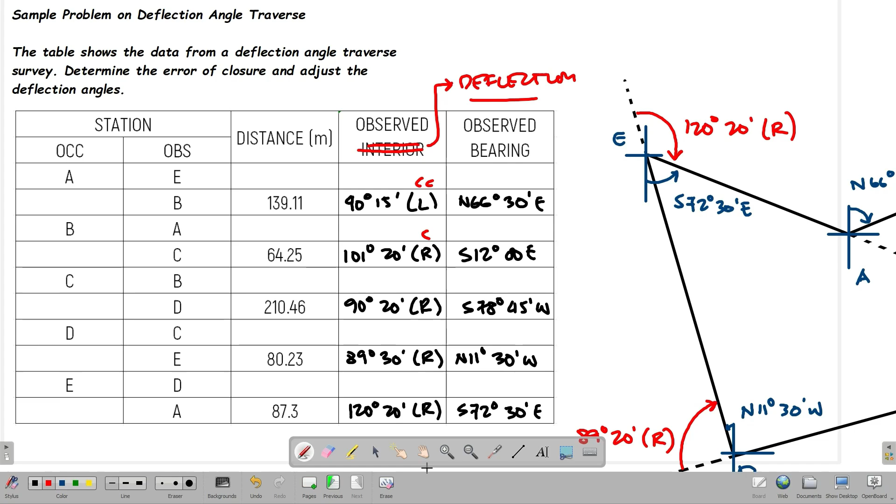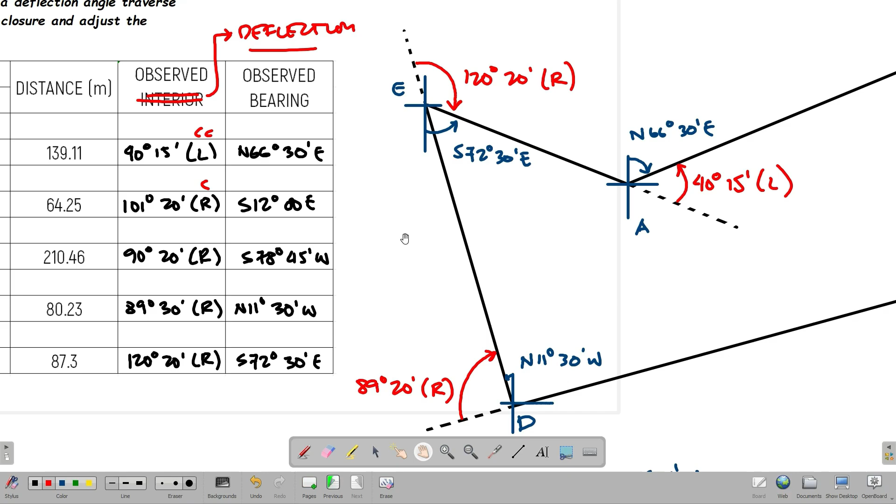We also have a given bearing for each line - bearing of AB, BC, CD, DE, and EA. This is our figure, based on the given values of deflection angle, bearing, and distance. It's not drawn exactly to scale, just estimated.

Let's first discuss the bearing since it's simpler. At point A, going to point B, that's northeast, 66 degrees 30 minutes east. So that's settled.

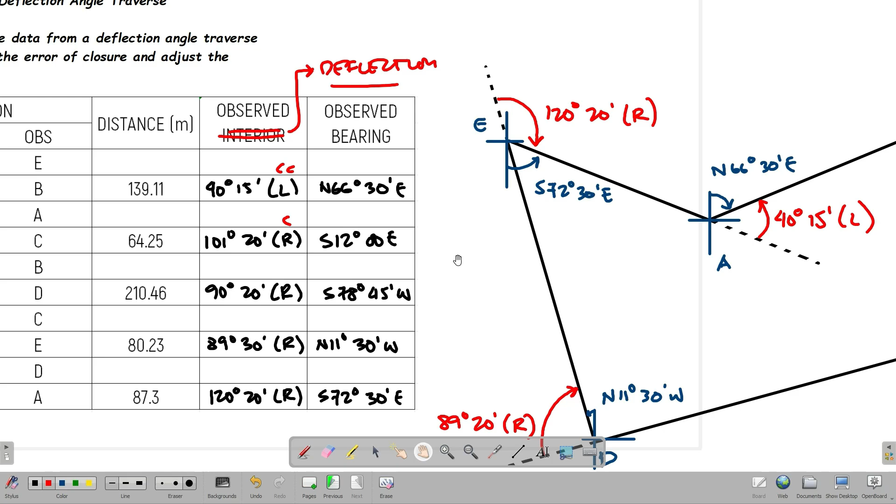The blue lines represent our bearing values. B to C, that's the second bearing, S12°00' East - from the vertical meridian going to the east, from the south, that's 12 degrees. Then this one, south, going west, from the vertical meridian south to west, that's 78 degrees.

This one is from the south. To clarify so it's not confusing - that's north. So south going east, that's 72 degrees 30 minutes east. So that's our bearing.

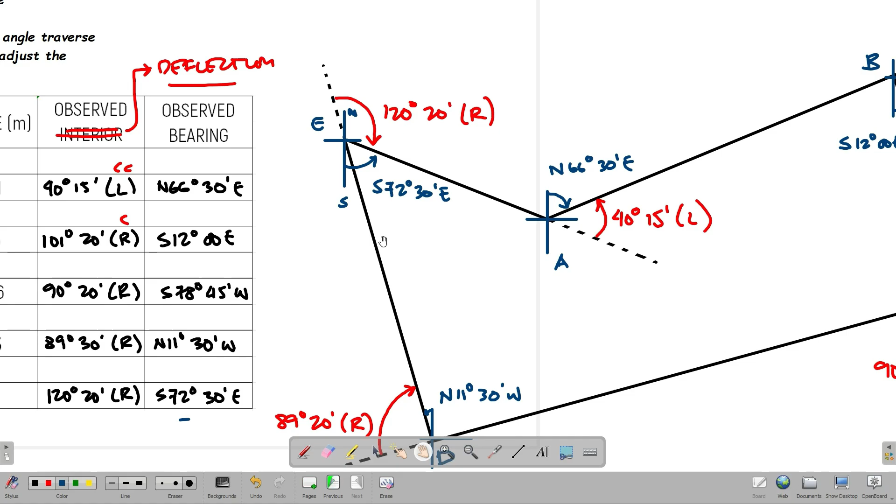The bearing is simpler to understand compared to drawing the deflection angle. Now let's go to the deflection angle - its definition is the angle from the prolongation of the preceding line. Based on our figure, the survey starts from point A.

The station occupied is at point A, and the direction of our survey goes from point A to point B, point C, point D, point E. So the preceding line, when we look at point A, is line EA, and its succeeding line is AB.

So the preceding line - the extension of EA - going to the succeeding line AB, is directed to the left, meaning counterclockwise. That's the direction of our arrow, counterclockwise, 40 degrees 15 minutes. Now at point B, the preceding line is AB, and the succeeding line is BC.

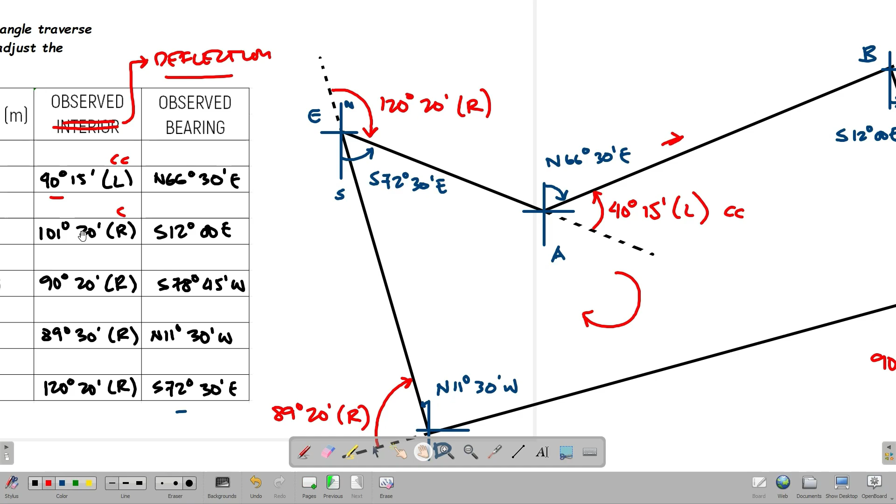So we extend line AB, directed to the right. Our angle is 101 degrees 20 minutes to the right, meaning the direction of our angle is clockwise. So that's 101 degrees 20 minutes to the right or clockwise. So this is our direction.

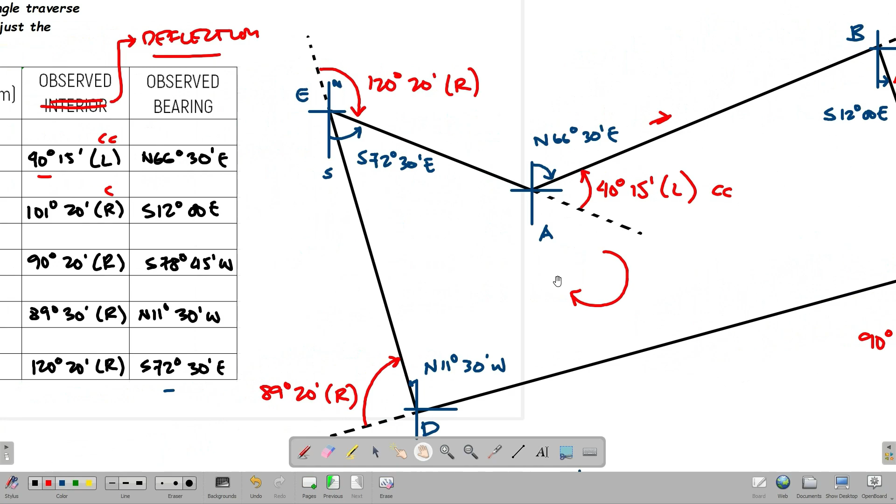Coming from the extension of the preceding line AB, going to the new or succeeding line, that's 101 degrees 20 minutes clockwise. So all our angles here, from this 101 going down there, which is 120 degrees 20 minutes, are to the right.

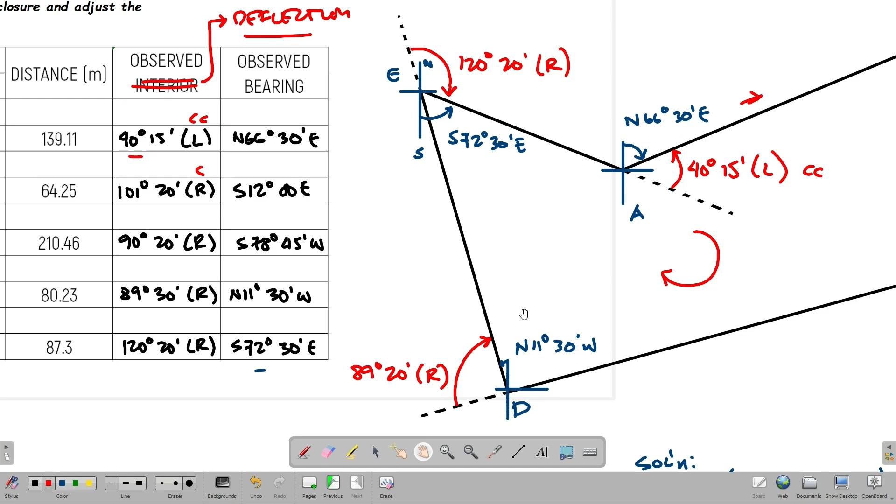Okay, then always the preceding line is what we extend. For example, at point C, our preceding line is BC, our succeeding line is CD. So we extend BC, then our angle is from the extension going to the new line. So this is our figure now.

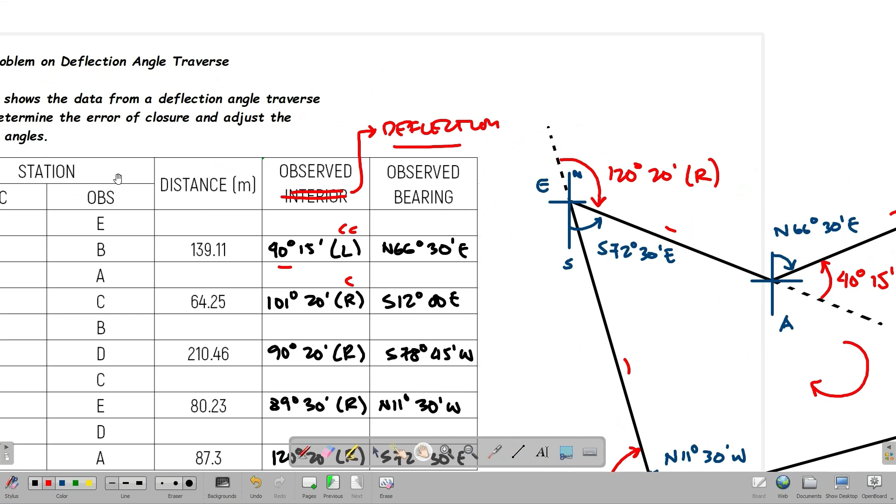The distances. Okay. So what we're doing here is the required error of closure and then adjust the deflection angles. So what we do here for the theory is that if our lines cross only once, the difference of our rotation, counterclockwise and clockwise, or vice versa, is always 360.

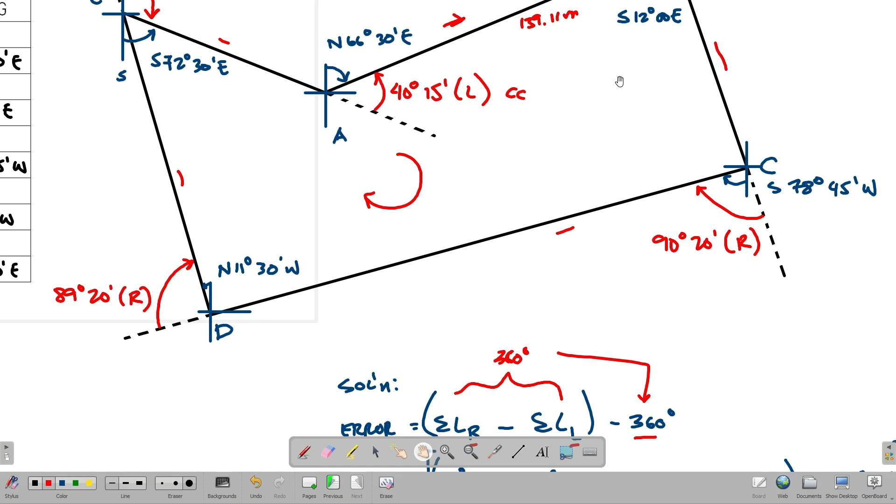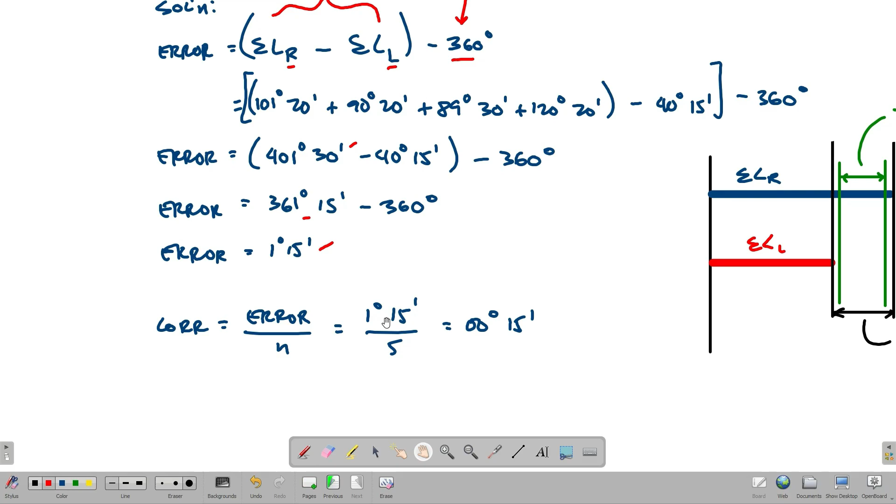So our error is 1 degree 15 minutes divided by 5. So that's 0 degrees 15 minutes. Let's just try it on our calculator.

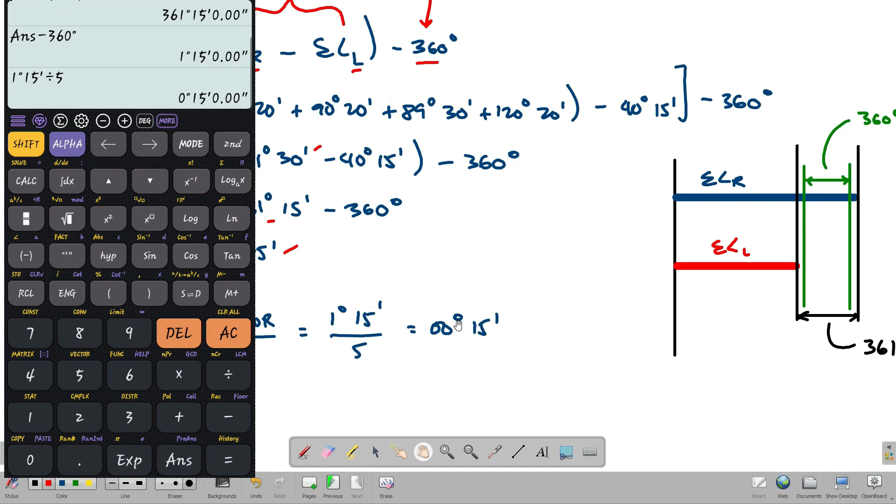So that's 1 degree 15 minutes divided by 5. So that's 15 minutes. Tama naman, confirm naman yung value natin.

Okay, so dito sa pag-apply, ang target natin, gusto natin i-minimize yung gap ng dalawang rotation, counterclockwise at clockwise, ay laging 360 degrees. So ito yung target natin, okay?

Ngayon, ang nangyari, medyo mas malaki yung gap, no? Kung titingnan natin dito sa figure natin, ito yung ginawa natin, yung blue is the summation of angles to the right, ito namang left is the summation of angles to the left. Medyo hindi siya drawn to scale din, kasi dapat maliit masyado yung angles to the left natin. Pero okay lang yan.

Para representation lang, okay? So ito yung target natin, which is the green, 360 degrees dapat na difference, no? Pero ngayon, lumagpas yung difference nila by 1 degree 15 minutes. So ibig sabihin, kailangan nating i-move closer yung gap natin, which is 361 degrees 15 minutes.

I-move natin closer na magiging 360 degrees na lang, yung gap. So ang gagawin natin, kailangan nating i-reduce yung mas malaking o dominant na summation, tapos i-increase naman natin yung lesser na summation. So we have minus dun sa mga angles natin to the right, and then we have add dun sa angles natin to the left. Mas madali pag ganito, no?

I-analyze mo na lang, kasi ito pwedeng baliktaran, no? Pwede magkabaliktad yung angle natin to the left at to the right na summation. Kunwari, ito ay summation ng angles to the left, tapos ito, summation ng angles to the right. So depende lang, no?

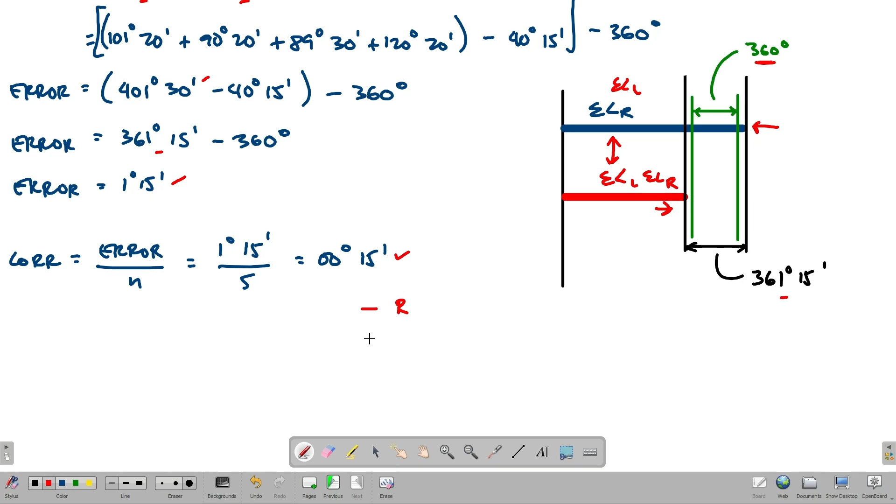So mali yung, dapat magsasubtract tayo sa mga R, tapos magpa-plus tayo sa mga left. Yun, yung left, dapat mag-add tayo. Okay, so I think yun na yun, no? Careful lang talaga tayo, i-analyze natin, no?

So again, this one is para lang ma-simplify natin yung pag-analyze natin pag-apply ng error. Target natin lagi is para makuha natin yung gap na 360 degrees between the rotation, whether mas malaki yung L or R, depende lang, no? Depende lang, so kailangan yung drawing para hindi ganun siya hirap na i-analyze.

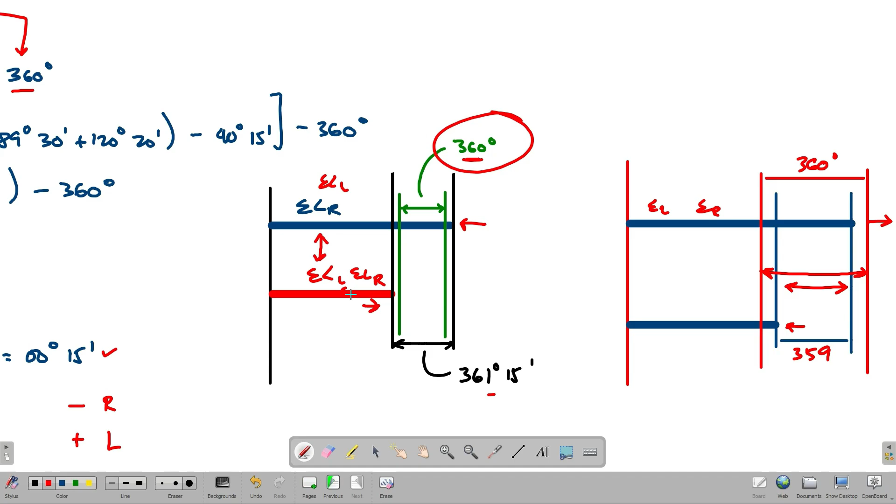Okay? So again, i-double check natin. So kailangan bawasan yun, tapos ito ay i-increase. So left natin dapat ay plus, tapos minus naman dito sa R. I think yun na yun.

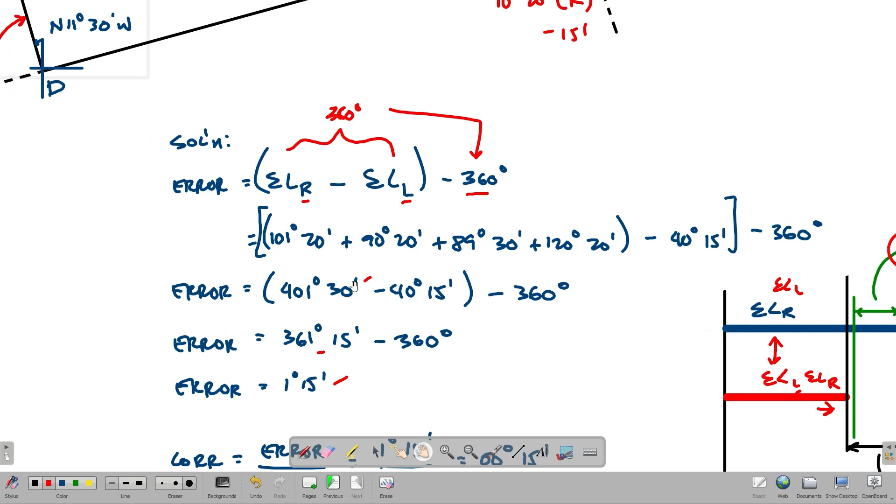No? Double check lagi sa mga sagot, tapos yun, kasi maling subtract or add, magkakamali na yung final na answer, no? Yung adjustment natin dito sa mga angles natin.

Okay? So yun, ito lang talaga yung tricky na part pag deflection angle. Pero tsaka yung drawing din pala, no?